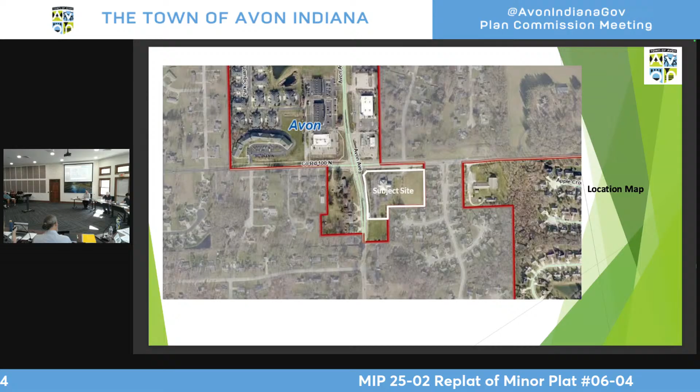Previous cases on this site included the development of the bank in 2006, and the remainder of the parcel you're considering tonight is undeveloped. This is the subject parcel outlined, at Avon Avenue and 100 North, with the bank property at the corner. The other lot we're considering tonight is this undeveloped piece to the east of the bank.

So lot 1 would contain the existing branch bank, and lot 2 would be available for development under the C2 district. We do not have any development plans proposed. The proposed subdivision is compliant with all sections of the Unified Development Ordinance.

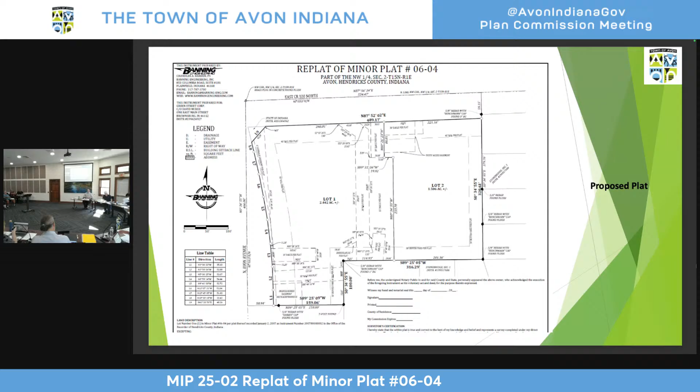This is a copy of the plat. You'll see lot 1 and lot 2. There's an existing entrance onto 100 North in between the two lots, and there'll be an easement that they'll share for that access. This is what it looks like with the bank on it - the bank here, the access here, and then that easement shared between lots 1 and 2.

Staff is recommending approval, subject to our standard conditions, and I'd be happy to answer any questions you may have.

That existing easement is an existing road cut then too for the access. Correct. There's a road cut here, and it's actually going to be on lot 2, with an easement proposed for that, so the bank will still have access. And then there's an access easement down here in this corner for this access.

Thank you. And this does not need a rezone or waivers or anything - it's just simply dividing one plat into 2 parcels. Correct. One commercial plat into 2 parcels. Okay.

Any further questions for staff? Okay, we'll have the petitioner come forward.

Good evening, my name is Parker Mays with Banning Engineering. Address is 853 Columbia Road, Suite 101 in Plainfield. Thank you, Linda, did a pretty good job explaining everything, made my job pretty easy. We agree with everything in the staff letter, and we're here looking for approval. If you have any questions, I'm happy to answer.

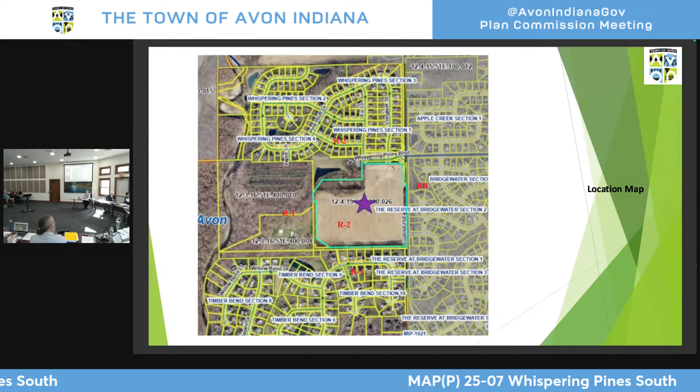This is a look at the layout of the 64 lots and common areas. The property would gain access via two existing stub streets to the north from Whispering Pines Boulevard, which would be extended south into this subdivision. There would also be a new street intersection near the southeast corner of the property, giving it two connections to the arterial street system.

There's a new retention pond in the northwest corner where drainage would flow before outletting to the existing Whispering Pines Pond in this area, before water continues on its natural pattern moving west.

The lots do all meet the minimum R2 standards for lot width, lot area, and other development standards, as well as the zoning commitments. As you may recall, lots along the south line had a commitment to be both wider and larger than the rest of the subdivision, since this doesn't technically abut Timber Bend because of an intervening strip, a driveway, but it's basically adjacent to Timber Bend, which is zoned R1 with larger lots. All lots meet the UDO standards as well as the higher zoning commitment standards in place.

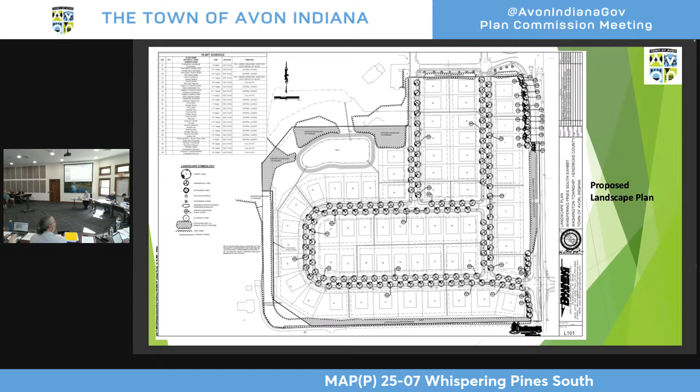So it does appear to be consistent with all the standards of the UDO, aside from the one waiver request, as well as being consistent with the zoning commitments in place.

To address the waiver: the request is for a 52-foot right-of-way width for the new internal streets. This wouldn't impact 625 East or Whispering Pines Boulevard, where the property gains access on the north; it's just for the new internal streets.

The town has several different street cross sections based on the zoning and the number of lots served by a particular street. We have a 1A, 1B, 2A, and 2B, which are for local internal streets, and then other standards for larger collector and arterial streets. In this case, we're talking specifically about the town's 2A standard.

Backing up a bit, when the petitioner filed this request, they originally requested a waiver for the improvements to match what's in the existing Whispering Pines neighborhood to the north, which has a little wider street pavement but narrower tree lawns and narrower sidewalks than the town's current standard. That's likely because Whispering Pines was initially approved and platted under county jurisdiction before being annexed into the town. That waiver request would have been with a 50-foot right-of-way.

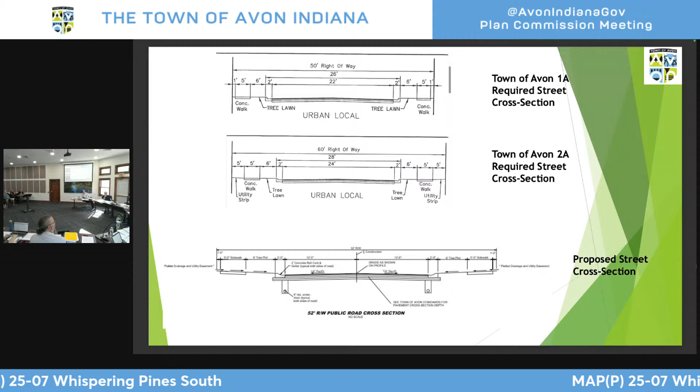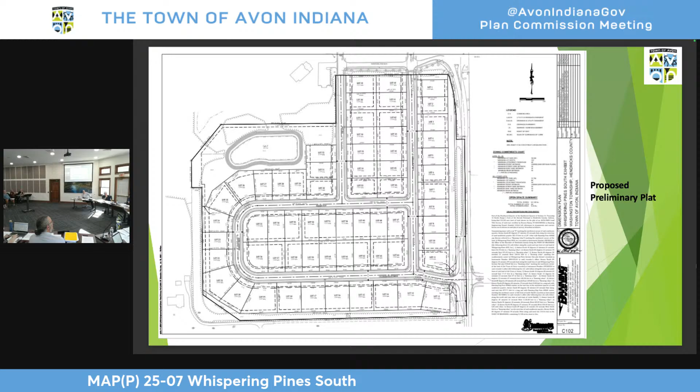That will allow the petitioner to have all their lots fit. Because there's a 20-foot drainage and utility easement platted, which if I go back to the plat, the right-of-way line is basically right here behind the sidewalk, back to this first dashed line. So there's no concern on the town's part that there won't be adequate room to install and service utilities or to maintain the public sidewalk. For those reasons, the town is supportive of reducing the right-of-way width from 60 feet down to 52 feet.

So we do support the waiver, and we also recommend approval of the plat because we believe it meets all other requirements of the UDO as well as the applicable commitments agreed to through the zoning process. We recommend approval subject to these standard conditions, and I'll be happy to answer any questions the commissioners may have.

So just to be clear, the waiver is not to request that the street be narrower, it's that the easement space be smaller. The utility easement would be, not technically an easement per se, it would be the right of way. Traditionally we would allow utilities to enter into and use that space, but because there's a 20-foot utility easement behind the right of way, there's not a need for that additional space.

But again, to answer the question, we're not doing anything different to the road. The road remains the same width, curb to curb. The asphalt, the curb size, the tree lawn between the curb and the sidewalk, and the width of the sidewalk would all be exactly to the town standard. And how does that compare to the width of the pavement in Whispering Pines? I believe the pavement is a couple feet wider actually in Whispering Pines.

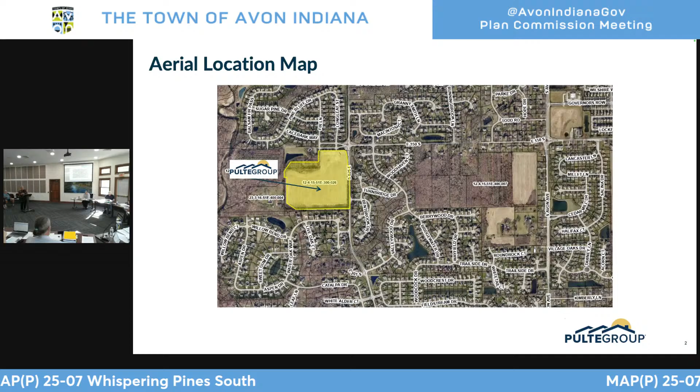This is the location for Whispering Pines. Paul did a good job identifying all these issues. This is a rendering of the current plat. It's a little prettier, I think, than the actual plat document.

The only significant change to this layout came when we went to town council. They requested that those tan lots—originally there were 9 of them—be reduced by one, relocating it toward that weird little common area to the north, and making the remaining lots larger, at 120 feet. Those lots are now 120 feet, matching the standard in Timber Bend; they were 110 feet when we were last at the Plan Commission as well.

And just so those who can't see the color difference understand, you're talking about the lots on the south side of the property. Yeah, the ones colored kind of brownish, pinkish tan.

There are 5.33 acres of common area, which equates to about 16.57% open space. That's more than 2 times the standard in your ordinance for R2.

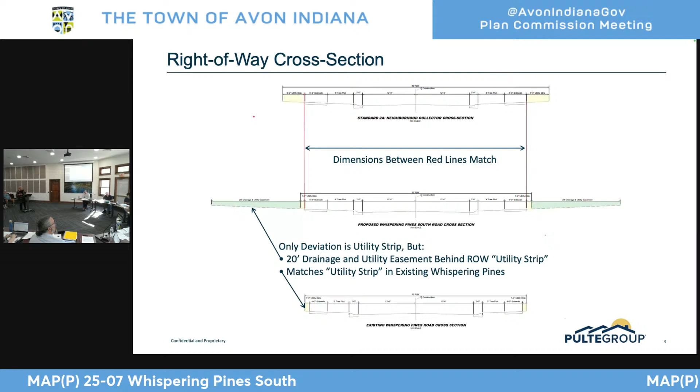So the only deviation from your 2A standard is the reduced utility strip, which allows us to get from the 4 feet on each side and reduce the right-of-way from 60 to 52 feet. I'd also note that the utility strip in existing Whispering Pines is actually only 1 foot, and existing Whispering Pines has narrower sidewalks and tree lawns too—4-foot sidewalks and 5-foot tree lawns. So we think it'll look better, and be more ADA compliant, to have the 5-foot sidewalks and larger tree lawns. That's the request for the waiver.

Mr. Vapor, I think, submitted written comments to staff this morning. We submitted a written response this afternoon. I don't intend to get into too much detail on those unless you have questions or unless I need to on rebuttal. I would just stand on my written response, but I would say that none of these issues go to the compliance of our plat with the UDO standards.

A lot of these issues were addressed. For the most part, these are just a renewal of the same issues that he raised on zoning, which we addressed in written commitments where we could. He now wants more than what we gave in zoning, but they're the same comments and concerns. We are working with town staff intimately on some of these issues, and we will continue to work with town staff through the construction plan phase. Some of these issues, the drainage issues, et cetera, will be revisited as well when our construction plans come up through the TAC process. But again, they're not an identifiable reason to reject a compliant plat.

If you have any questions, otherwise I'll save the rest of my time for rebuttal. Okay, thank you.

And it's unfair right now to seek a second bite at that apple. With regard to the easement for the maintenance on the fence, let me first say that a plat only covers property within our boundary lines. I can't create easements on property outside of what we own or control. We have provided common area sufficient to maintain the fence on our side, but I can't by plat create an easement on Mr. Vapor's property for the maintenance of the fence on his side. He will have to give us a private easement if he wants us to take care of that maintenance. So that's something outside of the plat process, because we can't put easements on property outside of what we control.

The comment with regard to existing woodlands to remain, again, that's just some language on a landscape plan that went beyond the limits of what we could print it on. We legally don't have the right to do anything to any trees or woodlands on their property, and nothing in the plat can change that fact. They control their property, we control ours. If they want them removed, they can remove them; if not, they don't have to. Although I would note that the existing Whispering Pines commitments that discourage the removal of trees do affect some portions of the Vapor property, because it was originally part of the rezoning at the county where those commitments came into play.

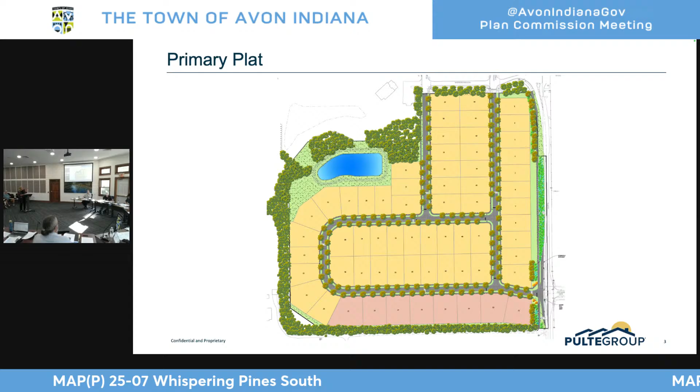Okay, we'll get into discussion. If we need clarification from either party, we will certainly ask you to come forward.

A question for staff here, and I appreciate the explanation in your report, because when I came in I was confused right away with street widths, and you helped correct me on my thinking. So it sounds like this utility strip would be town property or town maintenance, but now utilities are looking to put utilities in a non-easement, non-right-of-way area. So that utility strip, is that like a holdover from former development, where utilities have looked to get away from that, working with developers?

I don't know if I'd say it's just a holdover. I don't know if I'd say the town sees it as completely unnecessary. There could be situations where maybe there's not as much easement provided, or not as much space, depending on the zoning district and front setback requirement. There could be times when that would be necessary. But as mentioned, generally the utilities aren't using that space for the most part. So the granting of the waiver, if we would grant that, the town really is able to get what is needed to maintain the right of way. So the town doesn't really lose that capability.

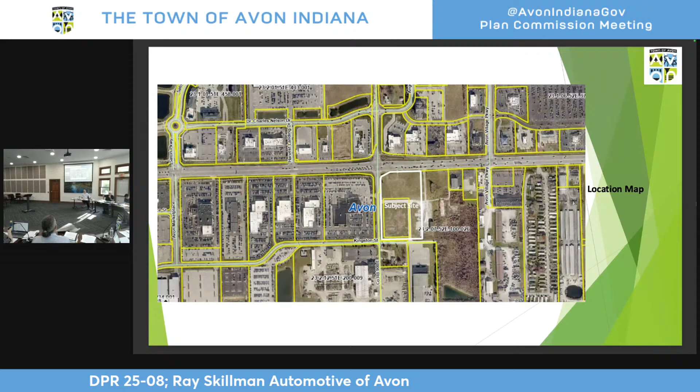This is the subject site, outlined at US 36 and 900. This is the site here, and it was part of a larger plat that came down like that. There are 6 car dealerships to the west along the south side of US 36.

This is a zoning map of the site. It's zoned C2, and automobile sales are permitted in C2 with a special exception. That special exception has already been granted by the Board of Zoning Appeals.

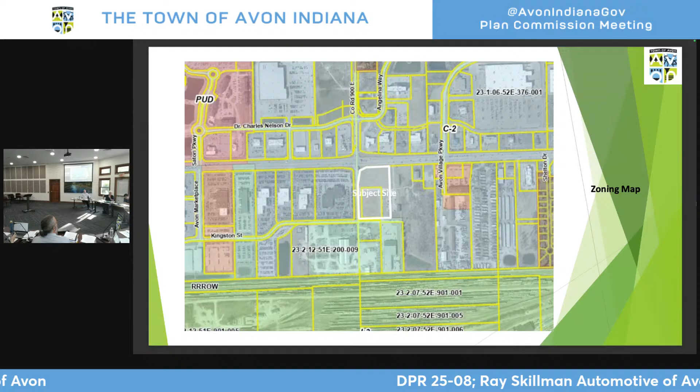This is the site plan for the site. The dealership building will be centralized in the middle of the site, with dealership operations on the north side of the building, and then the service center on the south side, as you see most dealerships set up.

Again, this setback variance was to have a 250-foot setback when 125 is the limit, and to have 6 rows of parking out front when 2 rows are normally the limit.

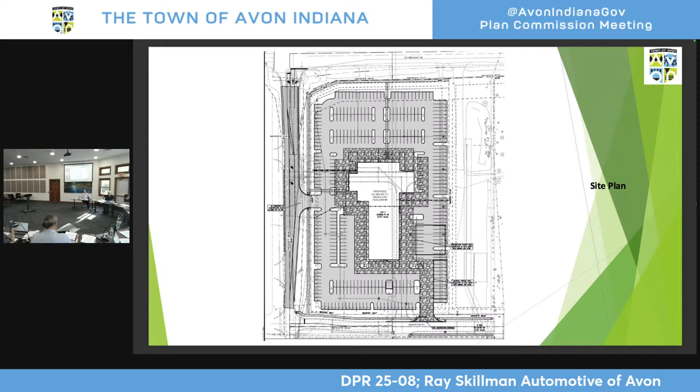The site is surrounded by commercial, except the property immediately to the east, which is undeveloped currently. It is not within the area retail of the comprehensive plan, but it is immediately adjacent to it, and extending that comprehensive bubble of area retail into this property is logical. That's what we use to determine that the comprehensive plan is being met for this site.

Aside from the waivers that we're going to get to, this is consistent with the UDO for development standards, and then we'll get to the design standards as well.

This is the list of the design standards that they have requested for the building. It does look like a lot, and I understand that, but we'll dive into it. I didn't put this list in your staff report. We looked at the building as one whole development and style, as opposed to narrowing down and getting into the weeds of each individual item.

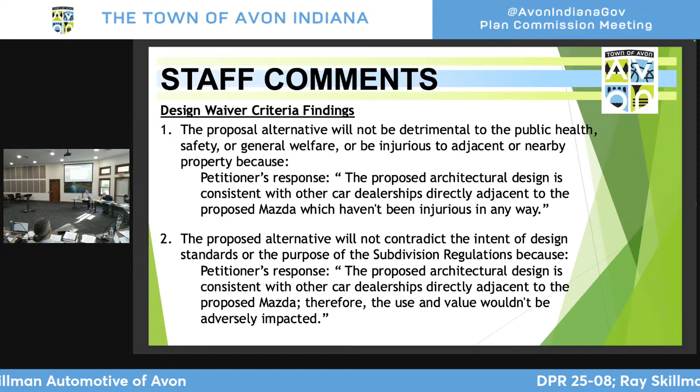These are the waivers, and the findings for the waiver are in your staff report. I've just listed what the petitioner has indicated as a response for each of the waivers. Pretty standard responses indicating that it would be a car dealership, and it's standard across normal dealership development that they have to meet a standard that the brand puts on them that they are not allowed to vary from.

We generally are supportive of design waivers for the dealerships. The six that are to the west of here all received design waivers for their buildings, and none of them meet any of the standards of the US 36 overlay.

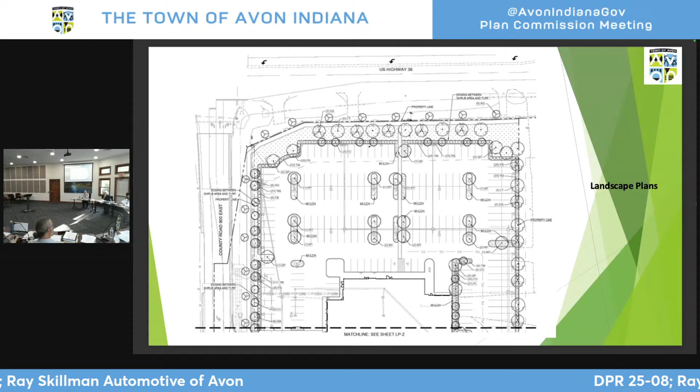That's correct. When you were talking with the petitioner, did they show you materials that they would like to use as an alternative to our ordinances? Because in the past, when we've talked to dealerships, one thing brought forward is they're bringing in superior materials, or materials that would enhance the development along 36, as opposed to being all masonry, like metal panels and glazing.

So they've shown us this elevation and provided what the materials are going to be, which are generally glass and metal. While it doesn't meet our standards for masonry and that sort of thing, we think the design is still superior for the type of building it is. We're not losing heightened architectural requirements, it's just a different kind of building for this type of use, not a compromise of architectural integrity.

So they're asking us to give a waiver against the ordinance without us seeing the materials they plan to use. And I guess, having seen enough of these developments, petitioners bring examples to help support their argument on why we wouldn't enforce, or want to see, our ordinances followed, as opposed to a different, more aesthetically pleasing material.

I'm assuming these are the design standards they can't deviate from, otherwise they can't develop here. They have to follow these development standards, design standards. Well, they have to meet our design standards if the waiver's not approved for the car dealership.

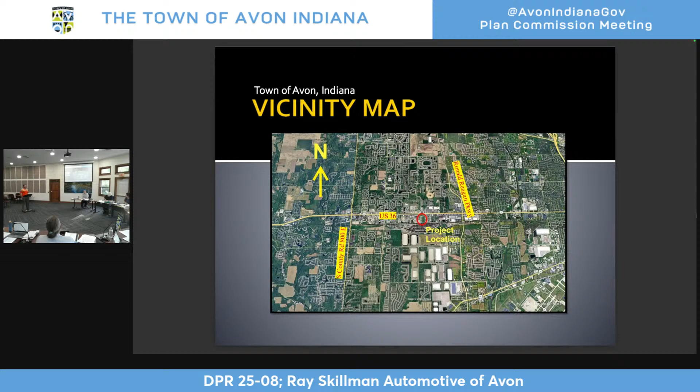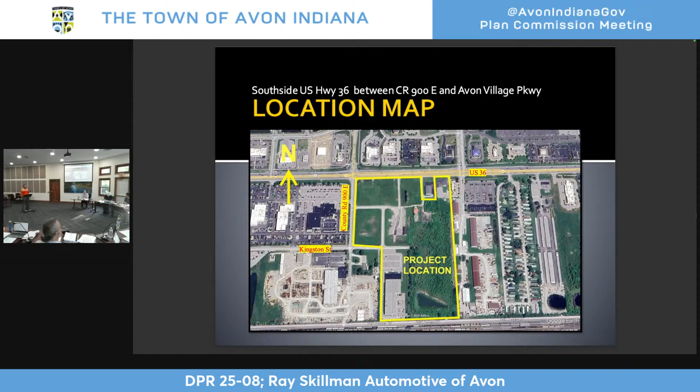Project site located on US 36 between County Road 900 East and Ronald Reagan Parkway, more specifically at the southeast corner of 900 East and US 36. The yellow line you see there is the plat list, the companion petition filed with the DPR. As Linda indicated, the project is zoned C2 and within tiers 1 and 2 of the US 36 overlay, which applies to the Mazda, the bulk of the DPR.

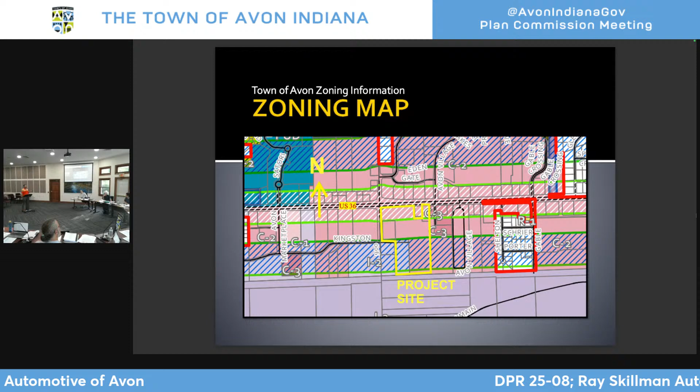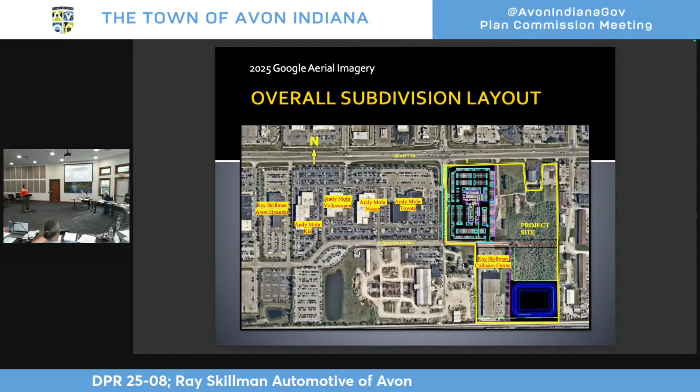As indicated, this is kind of car dealership row, essentially, with six car dealerships to the west. As you can see here, the proposed Ray Skillman Mazda is located on the southeast corner. As Linda indicated, the setback variance will allow for 250 feet, allowing the building to align with the other dealerships, and that was granted through the BZA.

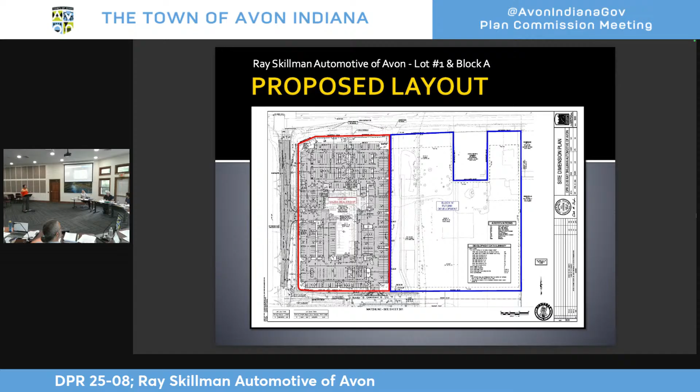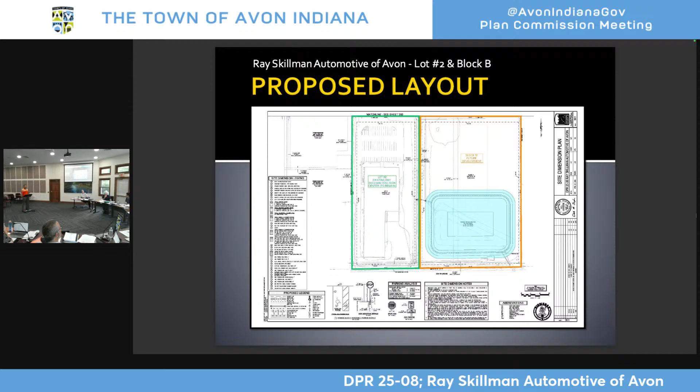Stormwater detention would be provided in the southeast corner. There's actually an existing detention pond there, and we would expand upon that to provide stormwater detention for the development.

So this is a blow-up, enhanced view of the site plan for the Mazda. The property, as indicated, the front setback, the variance allowed for the front of the building to align with the other dealerships, and the variance for the number of parking rows in front of the building.

In addition, we have our access, pedestrian access from public sidewalks along US 36 and 900 East. So the main pedestrian routes from those thoroughfares to the front of the building are shown.

Vehicular access to the property would be obtained off of County Road 900 East, as well as, and this is the south half of the proposed site plan, a relocated drive off of Kingston Street. As stated, the majority of the parking in front of the building would be used for vehicle display inventory, as well as some new car customer parking. And then we would anticipate that the parking in the southern half of the lot would be some inventory, as well as new car customer, maintenance and service customers, et cetera.

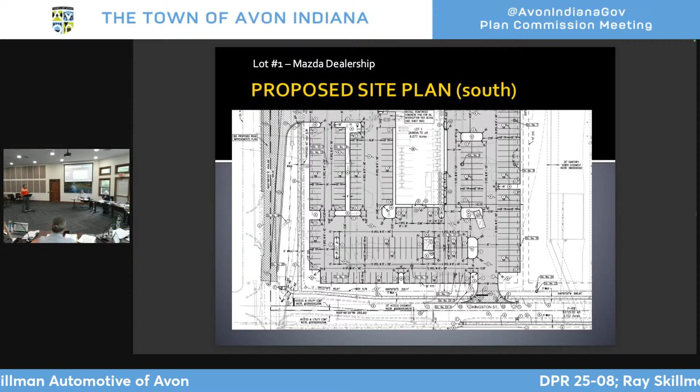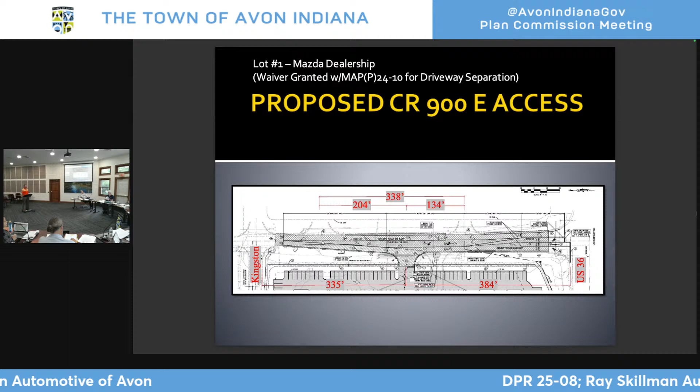This is just an enlarged view of the access. As you may recall, a waiver was granted for the driveway separation as part of the primary plat. Regardless, the access shown on the DPR construction plans is consistent with the MAP waiver.

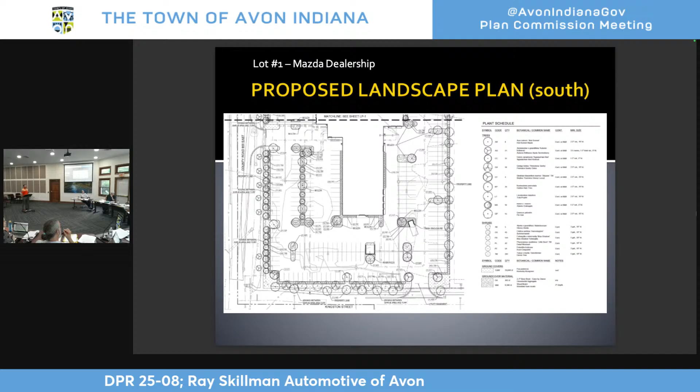And then the next slide shows the southern half of the property again, compliance with the UDO as it relates to landscape quantities and location, with the exception of the frontage directly adjacent to US 36.

So this time, I'm going to welcome Tom Montgomery of Montgomery Architects to come up and discuss the architectural building design.

I'm Tom Montgomery of Montgomery Architects, located at 6235 North Shore Drive, Unionville, Indiana. This is about a 40,000 square foot car dealership.

The service department is in the rear, approximately 14,700 square feet. There's a second floor, approximately 9,500 square feet. The majority of the building, the showroom portion, is on the north side of the building, which is along 36.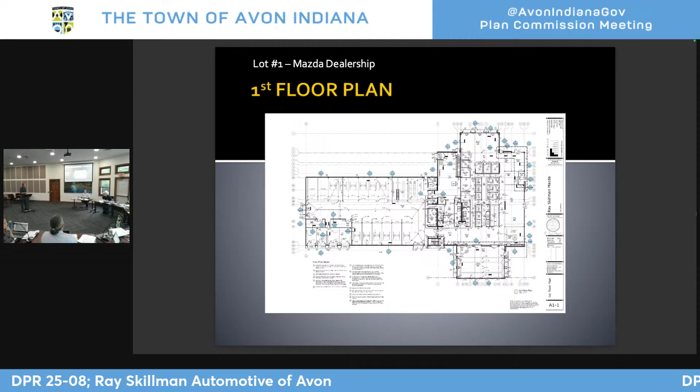This is Mazda's prototypical design. It's provided by Mazda. They like to stay with their brand. This is what everyone sees throughout the United States, and this is what the owner is requesting to build.

The materials are white aluminum composite material, like a 4mm aluminum panel on a plastic substrate. You see it on all the car dealerships up and down the road. This is a black aluminum composite material that surrounds a black frame curtain wall with clear glass, used to see within the building.

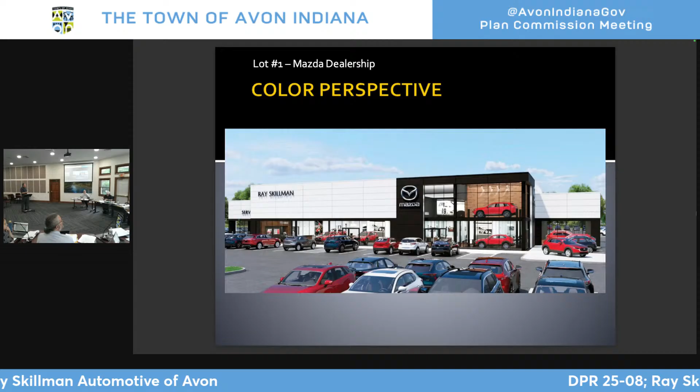At the bottom of the building is a black EIFS or Dryvit, kind of a frame of the lower glass that goes into the showroom. On the right side of the building is the new car delivery, where there are three service doors that enter on the side, also composed of white aluminum composite material and the black EIFS on the bottom.

This is just the front elevation. The top one's the front elevation of what I just showed you. The rendering was actually prepared by Mazda, and it's identical to this elevation. On the left-hand side is where the cars enter the service reception, and it also has the white aluminum composite material and the black EIFS on the bottom.

This is the rear elevation, the south elevation, the rear elevation of the service department. What we're proposing is painted precast concrete panels, a light gray, more of a medium gray. We also carry the ACM and the EIFS around the back as well, where the new car delivery and service reception jut out from the building.

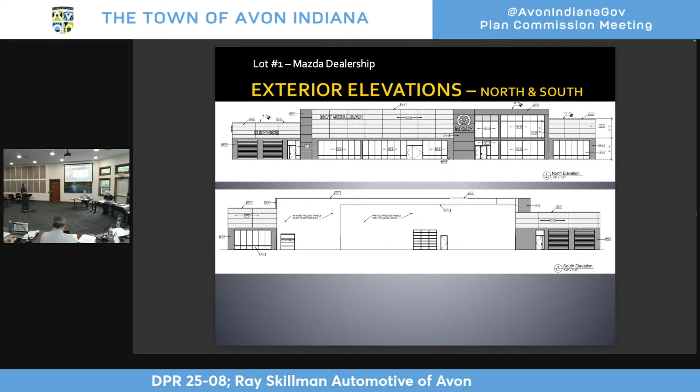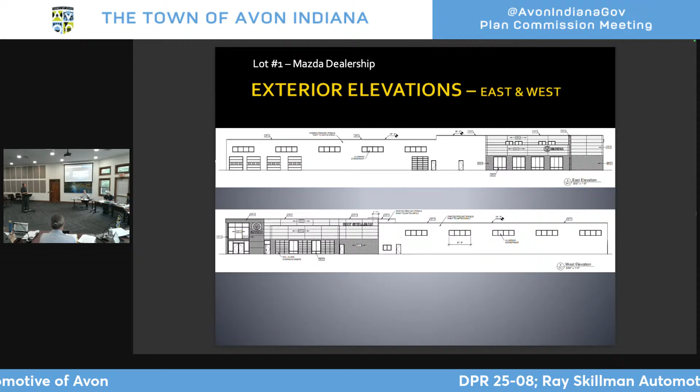These are the side elevations. This is the west elevation that faces Toyota. You see the service department on the right and the showroom area on the left, and this is the east elevation, same type of elevation.

And these are the exterior materials. Looks like a white ACM, black ACM. There's some EIFS material, a gray EIFS, but we're proposing to use a paint that matches the gray EIFS, so the service department will be similar to this color. That's all I have.

So the materials you just talked about, are those the same materials you have at your Hyundai dealership right down the street? They are. They use that same material exactly, the aluminum composite material. They use the bronze color on that.

I think they use EIFS as well on that project, and I think they use painted precast on the service department as well.

Thank you. Is there anybody present who has signed up to speak to remonstrate against this petition? No, there is not. Okay. I'm assuming you do not wish to rebut the lack of remonstration?

No, I would just say if there are any questions as to the waiver requests, we're happy to answer any of those. Had we been aware of the material request, I certainly would have come prepared with some samples in hand. But to Tom's point, we did the civil design on the Hyundai dealership, and it's been several years. I do recall that there were waivers requested for that, and if I recall correctly, Tom's right, building materials are pretty similar. I'm not 100% sure, we're not architects, but I kind of recall having very similar discussions, wherever it was, 8 years ago.

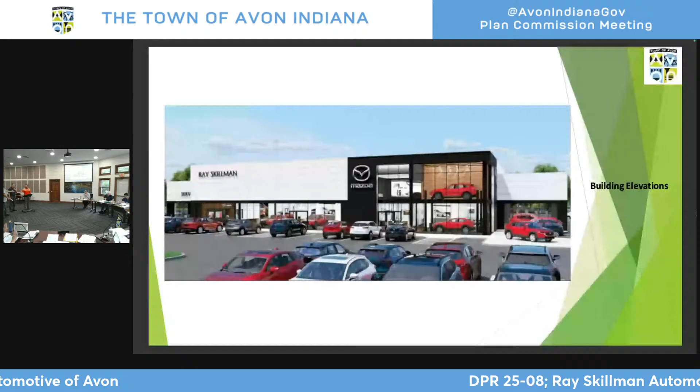Well, no, there's the other list of, page 4 of your staff report, where it lists all of the actual waivers. It's not just masonry, they're talking about plane projections and uninterrupted walls. Yes, and they're requesting waivers of that.

So I'm just going with building materials though right now, that the waiver is requested to be relieved of following the masonry requirement. Correct. But any of the materials that are used still have to be... well, do we have any other ordinances, thinking is there a requirement on the type of materials they're talking about? Or are those in our ordinances as being approved, like EIFS? All of the materials they're talking about, they are in lists of what's allowed and what's not. Okay, yes, so they still have to follow that. Yes, and if they don't follow that, then they're back here asking for another waiver. Correct. Okay, that's what I was asking. All right, thank you, you got there.

So I have some questions about how the town is looking at potentially using Kingston as a secondary thoroughfare behind the building. The front facade, I think, looks great on 36, it's architecturally interesting, it's got variations, but the back of that building is a precast concrete building, right? Just square block, straight walls, painted gray. Can you pull that up? As plain as can be, essentially.

And I think that does not meet the intent of what a secondary thoroughfare should look like. Essentially, you're looking at the back half of that building, all the white is just precast concrete, and there's nothing architecturally interesting about that. So I think that's where you're getting the 100-foot length without projections, and you're putting a lot of waivers in to get the back half of the building to look ugly so the front half can look good, essentially. I don't know if that meets the intent of what we're doing here.

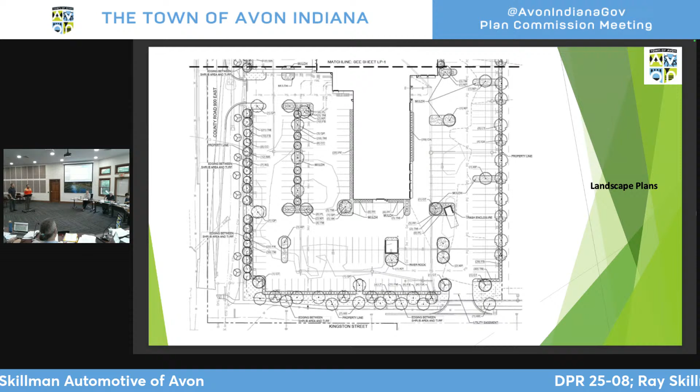Any further questions for the petitioner or further discussion before we address waiver A, noting that waiver A is actually a collection of waiver requests. Perhaps it would be good for us to just review what those are.

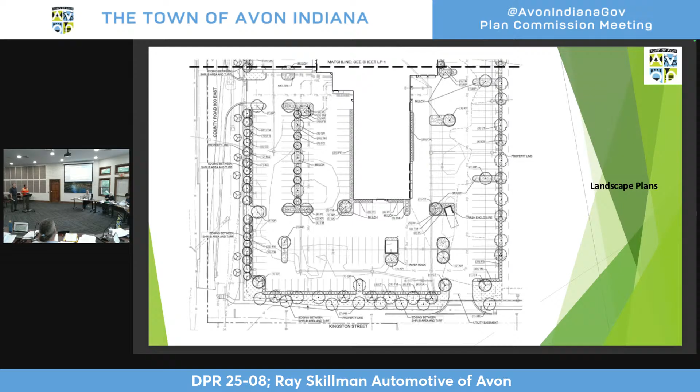From waiver A is what I'm concerned about. Waiver B, I think you've done a great job with the landscape plan—it breaks it up and provides flow through the site. I disagree with making those big waivers for the back two-thirds of that building and the large surface areas there, which could be architecturally more interesting with just a few modifications. I don't know what I'd propose, I'm not an architect, but it is a huge waiver for a prominent building on 36.

I'm not going to make suggestions—we don't negotiate designs. But if you were to wrap similar materials around the entire building, I know that's more expensive, I respect that, or something comparable that would provide more architectural interest, I think that would be a benefit. By doing all of these waivers, we make no requests for any additional changes to design, no requirements for it. So that's why I would hesitate on waiver A.

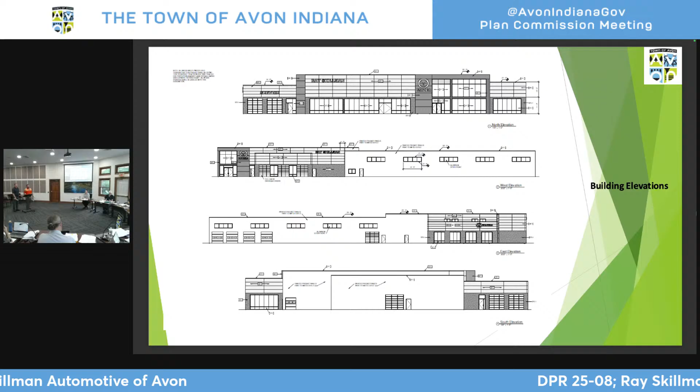So on all of these requests, uninterrupted wall longer than 50 feet, facades greater than 100 feet in length without projections or recesses, does that apply primarily to the back half of the building? I think the front's fine, there's plenty of projections and changes. Yeah, so this is mostly, we're looking at the back half of the building.

So would you say that the first one having to do with masonry is probably the only one that applies to the front half of the building? And everything else is about the back half of the building? I didn't look at the front yet. The front has so much variation, I just assumed it met all the other criteria, all the other ordinances. It's just the materials? Right, that's right.

Okay, I mean, again, number 1 is 80% masonry on the front, 50% masonry on the side. This is no masonry, no masonry anywhere, which would be consistent with the car dealerships and the materials that are being used. So while that didn't set a precedent by doing that, it still would make it look like the other. And we do want dealership consistency, yeah, in terms of that.

But that doesn't address your question. It does not, which has to do with not that there's no masonry, but that it's just painted cement, or there's just one material on the back half of the building.

It's like that business down the street on Kingston where they had 3 buildings, and the front was internal to the lot, with buildings facing each other. The rear of the building was on Kingston Street, and we asked for some design to make it look at least like a front, or more pleasant than doors with sidewalks running up to, or just a pad there, because it was fronting on Kingston Street. So this property has 3 front yards. Exactly.

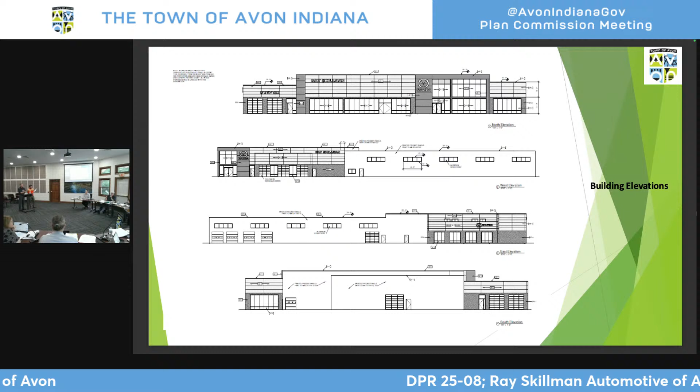I think we've seen that too with colors as opposed to actual physical projections, or reduced projections, because Costco's a good example of going too far out would actually have an impact on delivery trucks. So it was reduced on the extension bay colors to give you that impression of depth or whatever. And then the roof line, lots of that kind of stuff.

Something, because I'm looking at number 3 and 4, the 50-foot and the 100-foot walls, same thing. Those are the plain areas there, because you've got front yards, and you're fronting on 3 streets that are significant, will be significant. I mean, basically we're talking aesthetics here, that's my view. It's purely aesthetic. I don't want to change the functionality and the primary structure of the building, because that's a whole other issue. So three and four, same thing, uninterrupted without projections or recesses.

I think you're hearing we would be open to alternatives that you might propose to us. We're obviously not voting, not telling you right now.

Number 5, provide walls without repeating patterns. I'm not sure what that means. Someone wants to put a houndstooth wallpaper up? We'd like to see things that repeat. So this would almost qualify with these windows, how they repeat across the facade, or in the front, how there's vertical lines that repeat across. So you already have repeating patterns-ish. I did not take the windows into consideration. Windows might not have been in there when I looked.

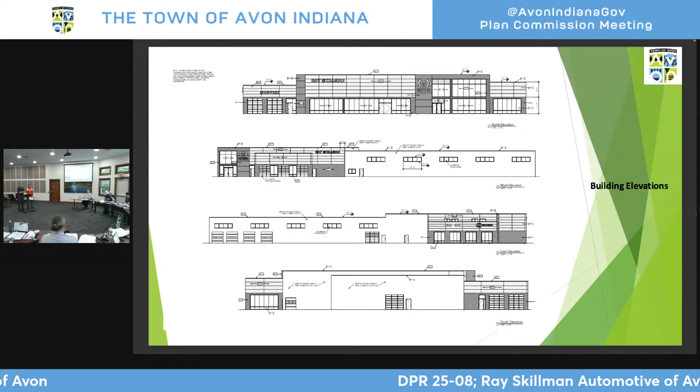So is there a request for continuance? Yes, I think we would like to request a continuance to July. And this is their first continuance? It is, which means it's a continuance of right. So do we need to vote on that? You still vote on it. Okay, motion. I'll move that we continue DPR 25-08, Ray Skillman Automotive of Avon, to, can you make July?

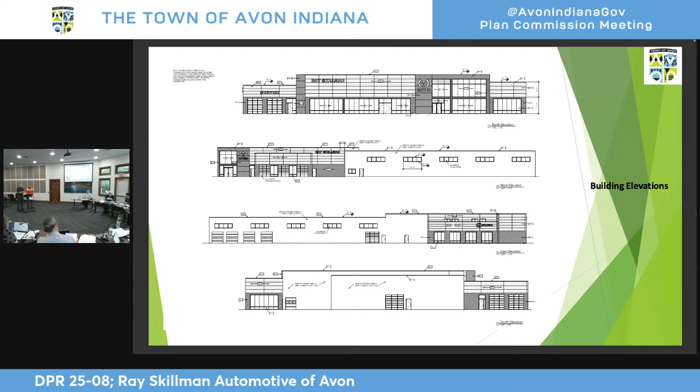To the July 28th meeting of the Plan Commission - that would be with no additional public notice, correct?

Having heard a motion and a second, we'll take a vote. Guckenberger, yes. Zuzen, yes. Lockebrand, yes. Reed, yes. Kaufman, yes. Ransberg, yes.

Motion carries. This petition is continued to the July 28th meeting. Thank you so much. Thank you for listening to us.

Other business, any other business? Staff does not have any, but I'd like to bring something up.

We've talked about some things tonight that I'm adding to the list. We seem to be seeing waivers over and over again of the same things, which calls into question whether our UDO is what it needs to be. I was having a conversation with Paul earlier - when we did the UDO, before Linda and Paul joined the town, the developers were part of the group that helped put the UDO together. So now we're getting waiver requests from the developers on some of the things as they do development.

I'm going to pick on how many units before they have to have a second entrance into the subdivision. We talked about foundation plantings. Street width is another thing that's been a discussion. So I would like us to look at and make a plan to address this. We've talked about it, but let's get something actionable, because we keep seeing the same type of waivers over and over again.